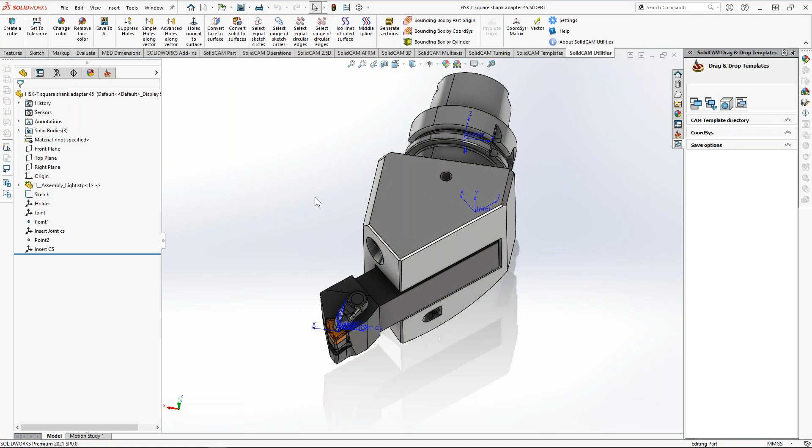I will be using the same part I used in the past, and probably remember the holder that we used in the previous webinar. In that webinar, I showed two very important rules about the insert and the joint itself. The joint has to be at the bottom of the insert, but the insert coordinate system should be on top where the Z goes up, while for the joint, the Y goes up, okay?

I also grabbed a couple of questions in the chat, like, do we really need to position it like that? It's quite hard to orientate the tool correctly, and what are the rules for this? Yes, and I promise I will show you all the rules about any inserts that SolidCAM supports.

So what is basically the rule? I will start with modification of this holder, but before modifying the coordinate systems here, I will show you how to not just remember everything I'm going to show you, but actually how to find it by yourself. Okay, what are basically the rules?

You can find this information in many different ways, but I'll show you my favorite. You just open the standalone toolkit and open it in tool assemblies. The reason for the tool assemblies is because you can insert any insert that SolidCAM actually supports.

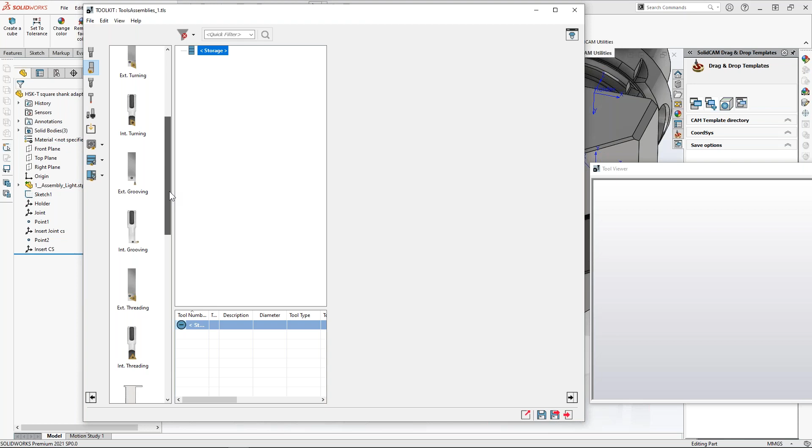So let me add external turning, internal turning, grooving. Of course, not in this way - let me remove this and start from the beginning. So I will add external turning, then internal turning, then internal grooving, external threading, and that will be it for now.

Now, what is so nice about it is you can use the tool viewer here, and it will show you - let me start from external turning - how the coordinate system should actually look. This is for the joint itself, and you can also click on the profile. What's nice is you can actually see the axis orientation. As you can see, it goes through the real middle of the insert, following this - it's symmetric to these two edges.

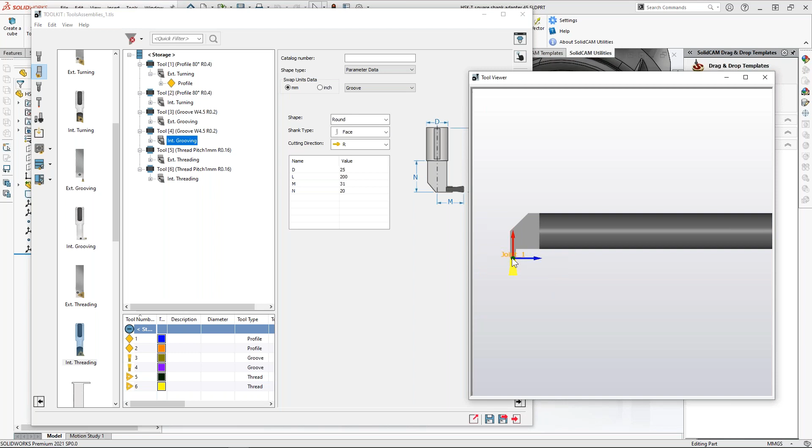So let's go with another one. As you can see, for the internal, it's the same - X is there. For internal grooving and external grooving, X goes in this direction. For internal, it's going in the axis of the insert itself, as you can see here. For the thread, it follows basically the same rule as external and internal turning, and we also have internal threading, which is basically the same. So the X-axis is the most important - it's always in the middle and goes toward that.

If you follow this rule with any insert type available on any tool manufacturer's website, you can download them. Before you actually define any of the shanks or inserts, guys, I recommend you first define it here in the tool assemblies so you can understand where the X should be. You don't really need to remember it - I could put everything in pictures in the presentations, but I think nobody would remember that.

I think this is the best way to find out how the insert should look like. So with that said, now we can actually talk about this insert over here.

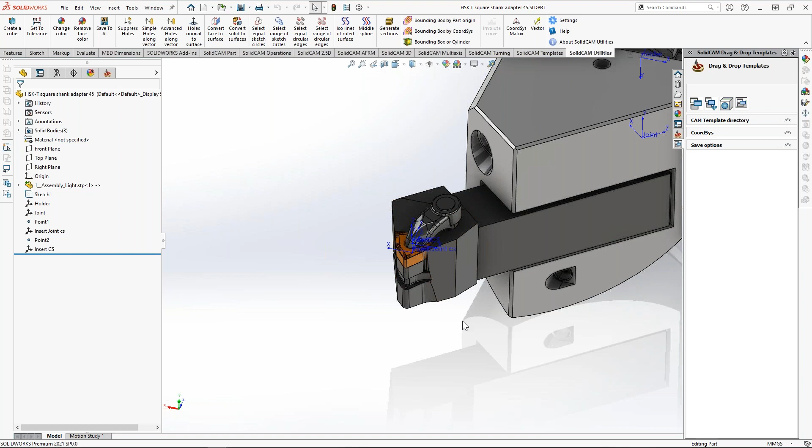I'll just basically use the external turning here, and X must follow this position. You can also change the insert shape, and you will find that X is actually not changing. It is changing depending on the insert type, but the rule is basically the same, except when the shape is R, but I think you got my point.

Now when you know that, the things I'm going to show you in the next couple of minutes is basically just replicating what I just told you.

Let's start with the insert over here. For this, it is required to define a little bit of some sketches in order to better define the insert itself. So I'll be hiding the shank in this case, and I will create, let me go over here, and I'll define, no, I need a point as well.

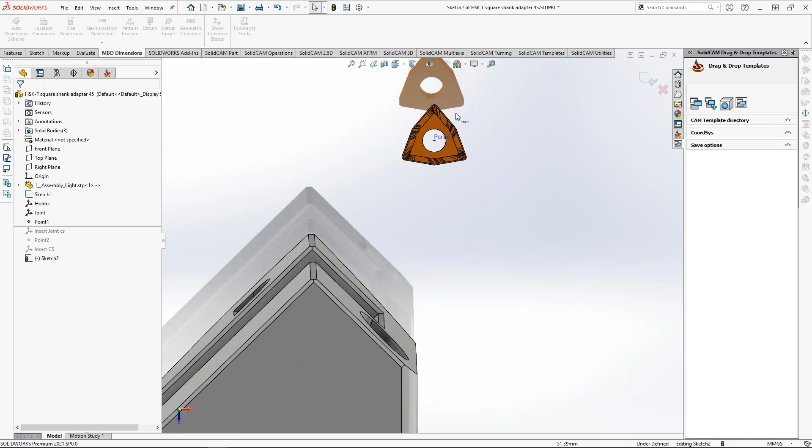I'll define two lines basically, which represent my X and Z axis, or X and Y axis, depends on what we are going to define. So I'll just select a line. The line has to go in this direction for the X. Let me go like this. The X must go here, with red, and Z or Y must go in this direction, and this should be the Y itself.

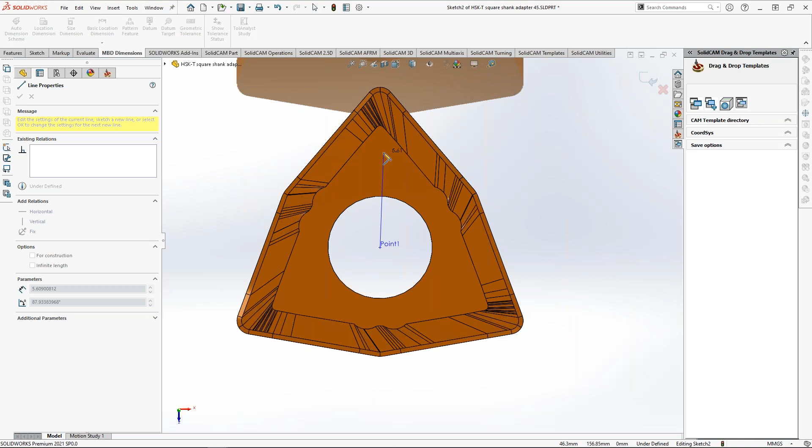So let's do that. I can go to the plane. It's pretty easy, just define anything like in this direction. Then I will just create another line. You can do it to be normal automatically, and I'll just click on the point, and you can click over here and say concentric, and it automatically knows where it is. That's basically it.

Now you can use this sketch for all coordinate systems here. So I'll be defining for the joint itself. For the joint, I'll be clicking this to be my X. For my Y, I want this one, and for my Z, this one over here. And this is the X orientation of my joint. So just remember, X is the most important, okay?

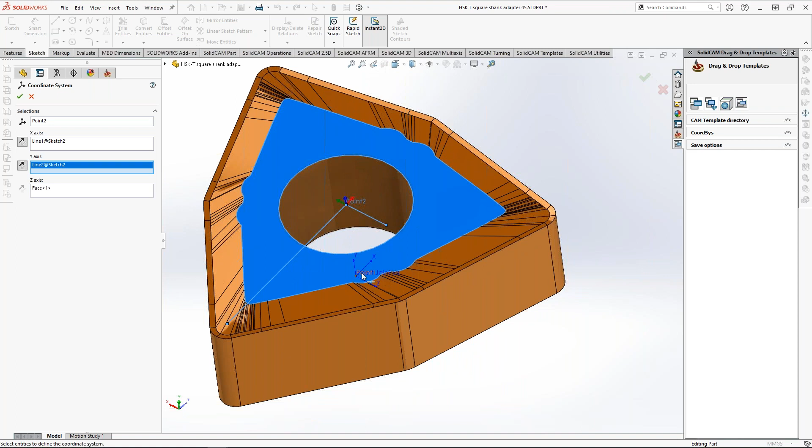I'll be saving this. Let's go to the insert itself. My X, again, this one. My Y is this one, and Z is going up, but I want my X to follow the same orientation as for the joint. So I will just switch my X in this case, and Y. The result should be the X follows also the joint coordinate system.

All right, so let's export this. First I'm going to export, let's say, the insert itself. So File, Save As. I will be putting this in the same folder as I was doing it before, the turning insert, and let me just put it into STL. Here it is already, so I will basically override it. I'll click on the options, again clicking on insert coordinate system, I'll be doing it fine. Click save and just override it.

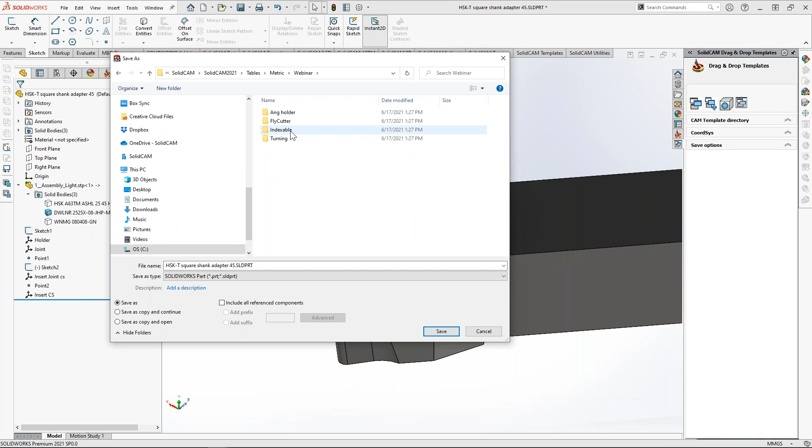Then I will unhide this one, the shank, and then I will export just the shank itself. So let's go again. There'll be a lot of this exporting, I could basically just export everything and show you the main stuff, but I think it's also kind of nice to see the complete workflow of how I'm actually doing it. Now let me go with the STL. Actually, in this case, I have it over here. That's fine, so I don't need to change the name.

And this will be, I think it's the joint here. The joint is actually the coordinate system of the shank. If you remember it, I think I didn't make a mistake. I will see it here. Yeah, exactly, so it will be completely fine. All right, so that's basically it.

Let's go to our project, and I will be just editing this tool component. I'll be again using the webinar, the one that we used in the past. And this time, let me see which one it is. This one, so I will be deleting this one. And let me just create it again. Yeah, so let's choose a 3D model.

Let's go to the webinar, turning shank. Let me rename it and just open it. Rename it over here, put it there.

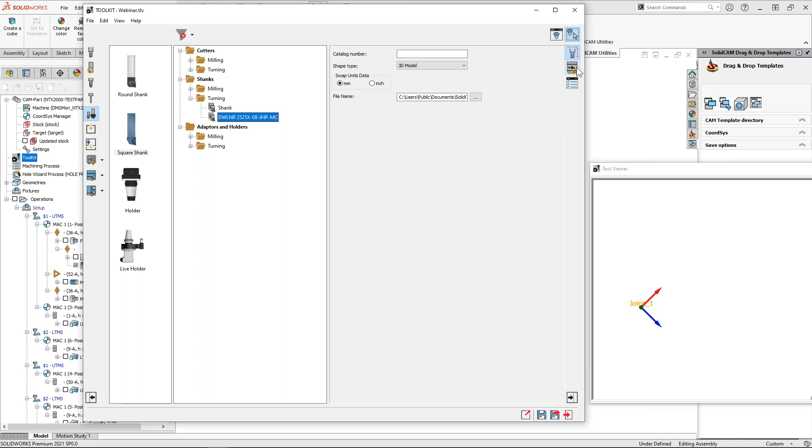Okay, perfect. Of course, we need to define the connections. So as last time, we'll just go over here. And you could probably note that I'm using a new version of utilities. I'll at least try to give you a short overview of what we have here new. Coordinate system matrix, the icon is changed a bit, and we have a new option of vector that I'll try to cover by the end of the webinar, okay?

So I would click on the coordinate system matrix. And by the way, it's still in development version, so you will get it on the website quite shortly.

So my master will be the joint, and the slave coordinate system will be, where it is, insert. I actually want to be insert joint. Here it is. Yeah, but I actually wanted to. Okay, so I'll just be clicking on, I'll just taking a snapshot here.

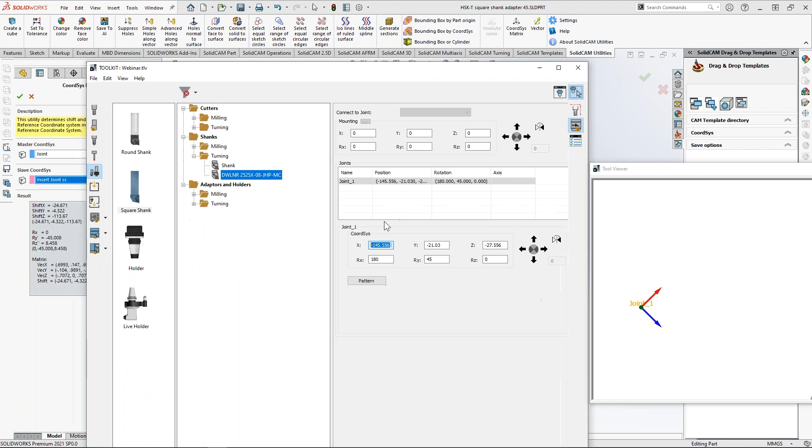I'll just move it to another screen so you don't actually basically see it at the moment. It's not so important. I'll go to the connection here and I'll just write here the values. The shifts are not the same. So let me just double check. So master, insert, that's okay. So let's see, so minus 24, 671, minus 4 point.

And of course, guys, also somebody is asking me, can we improve this also a bit? There will be a direct input from the connection itself. We are looking to find a decent solution for this. For now, just use the utility. I think that will be okay for now.

And as well as 58 here. So that's okay. Let's see. So the tool view.

That looks great. So let's analyze it again. So X should go, follow this direction over here. And we will just insert this one. So I'll just delete this, put another.

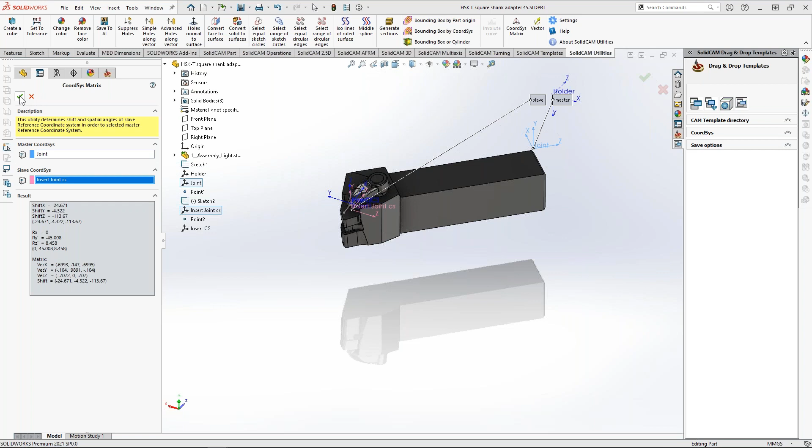It's a 3D model. I'll just be picking up this one. Rename. It's there. Okay, what we have to do, it's just to see how it looks like in Part Tool Table Library. I will be basically putting it into magazine, guys. Okay, so I will be defining like at least 2 or 3 similar type of tools, okay, with the similar shanks, and then we are going to put it into the 3-side holder. I think that this is the main idea.

So let me just, let's use the volt webinar. We'll use the shank. I'll just double click here. And on the insert, I will also double click here. Now, what is so nice here, let me just go to the connection.

And the only thing, guys, what you really have to do is to rotate the insert itself as it's coming like a default, like that. But as you can see now, there is no need to do anything. It is in perfect position here.

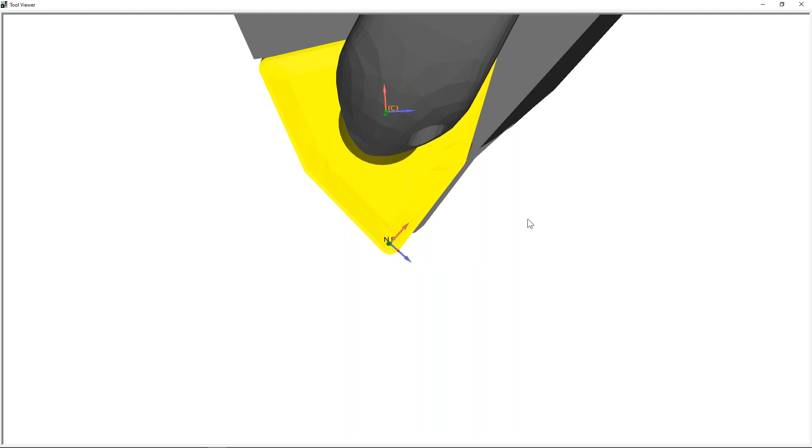Now, of course, if you want to change the offset here, the nose point, you can do that, of course. For now, if you want to do that in the cutting point, you can, of course, change it here. So you can pick it here, or depends where actually it is located in machine environment.

So I'll be clicking on machine preview. Here is the machine preview, and let me just put that into my station. And this is how it looks like.

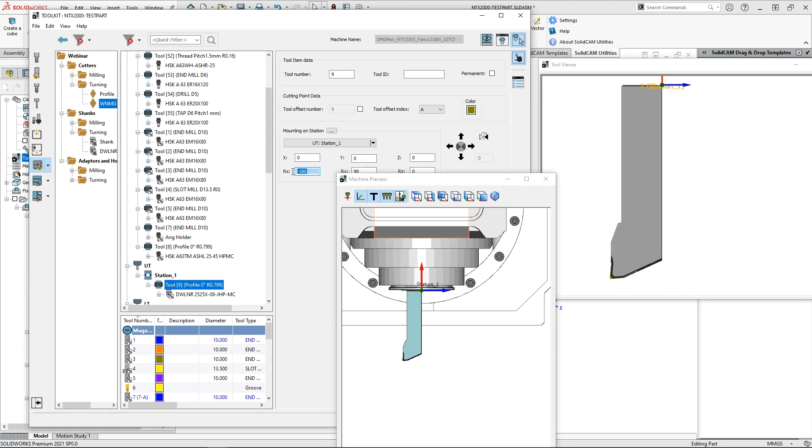Now, I say that my second subject will be basically the spindle orientation, guys. So, of course, if I rotate now this around the x-axis, and not shift, but this, of course, it will also work. I mean, this is just different orientation.

But if you want to, for example, use this tool for main spindle and sub spindle, so you'll have basically two different kinds of work offsets, you definitely need to use something that is called spindle orientation. Changing the spindle orientation from 0 to 180 degrees will allow you to have tool in two different spindle orientations with two different tool offsets to be used, also in the main as well as in the sub spindle.

For now, I will just show you that this cutting point here, it's just selected here. And you probably remember that we have here measured orientation where we can define also different B-axis angle.

But I want to show you, I'll just stop here for a moment and I'll just save and exit. I'll be showing you the option of activating the spindle orientation.

And what it changed in the toolkit is the way how we can actually set our tool offsets. So if I go over here and click on our cutting point, let me just allow machine preview here. So I have now the orientation, which is like a default one, but what's nice is that now we have here a spindle orientation function, which basically we can set like this.

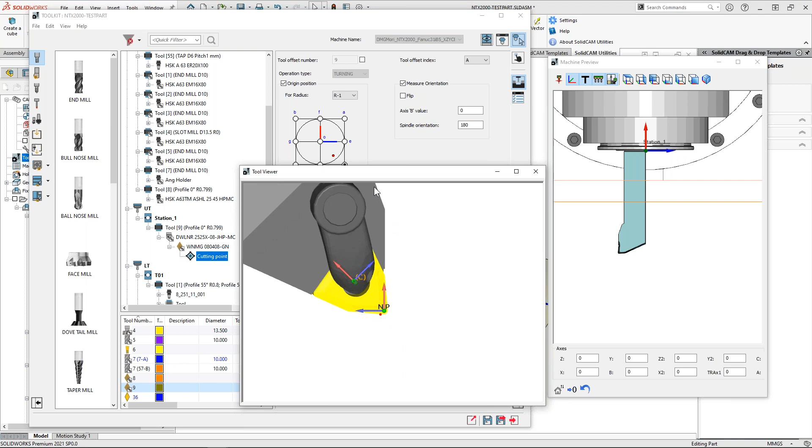So I can click on the measured orientation and I can say here 180 degrees. I just want to show you how this looks like. You can see basically in the preview, live, the orientation of your tool. Here it is, I like it, it's over here. So let me just use the proper one.

And here it is. Now, how this is matching, just rotate it over here. You will see this is the same orientation, and this is the point which will actually be the tool offset in this offset, okay?

Now if you want to use another one, you can add a new cutting point, and now you can measure your tool over here. So I can pick a different origin, I can set this one in this orientation. So basically, with the same tool item, I can have two different orientations used in jobs.

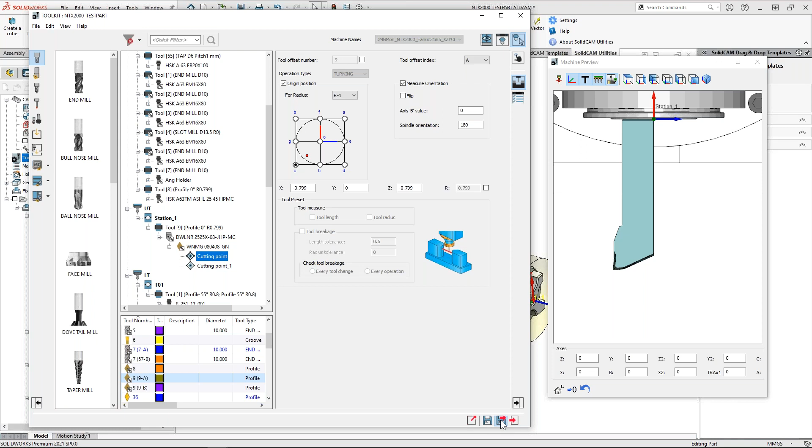All right, this is regarding the spindle orientation, but of course, guys, I will be showing you even more advanced stuff with spindle orientation. This is so nice with the three-side angular holder that I think most of our customers have been waiting for this for 5 years at least. Not so common, but it's something really nice to have, the capability of using it with different shanks and sensors as well.

So with that said, let's go to another example. I will be now using something different, and I have received so many requests - can you please show us this and this and this? So let me pick up something. Let's see here.

Yeah, it was a groove with 3 mm. Let me just find it. I think it's this one, but no. This one is a groove, maybe not actually. Let's see.

Yes, exactly. Now this particular tool is just 12 mm, so it's nice for the cutoff. Also for grooving, not for the cutoff, and especially for the Swiss type machine. So I'll be using this particular one at the Swiss type machine. But what's so nice about this one is the very special insert. It's a groove, of course.

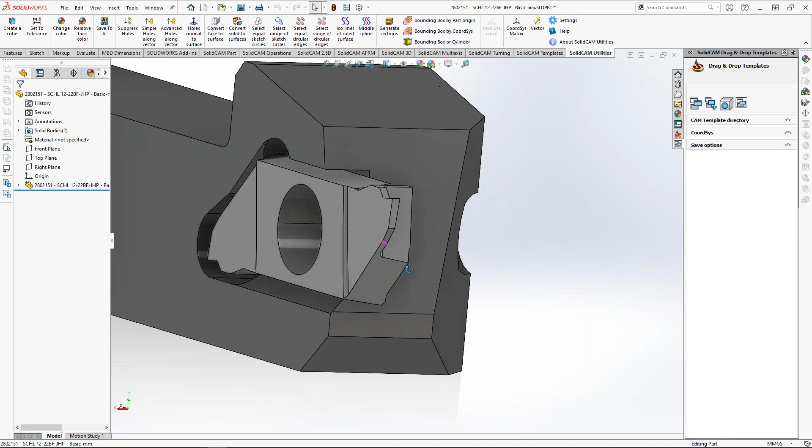And everybody wonders how we can define this, especially here - it has some kind of weird angle here. So how can we define this particular groove tool?

So let's start with this. Again, I don't want to show you again, guys, the stuff in the assembly that I've shown previously, but basically the idea is that we will define a coordinate system where my y-axis, for the joint coordinate system, will go up here, and x is going in this direction. For the insert it will be the same here, but for the insert it will go with z here. Okay, so this is the main rule that we actually have.

But here we have another problem: the insert height is not the same on this point and not the same on this point over here. And it also has a slight angle, and the same insert is basically kind of mirrored in the middle. So how can we support this?

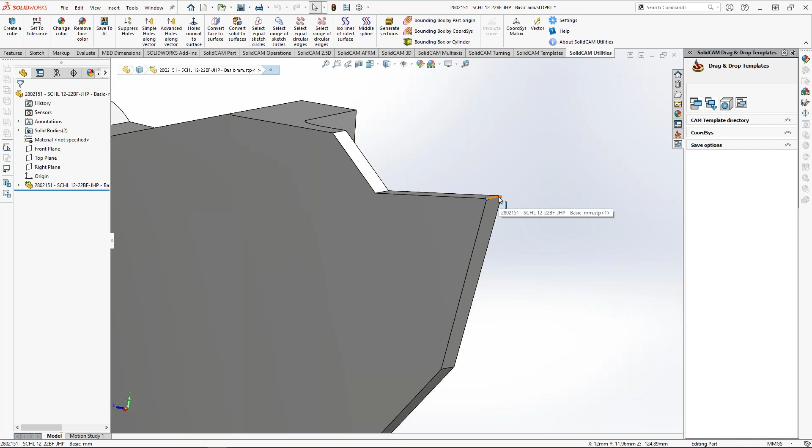The idea is to bring your insert coordinate system onto the level of this edge over here. And basically the joint will be at the very bottom of the insert, okay? So how do we do that, guys?

So first I will be defining a plane. And my first reference will be, no not the vertex, but I want this plane over here. I want it to be parallel to this one. And my second reference will be just this point. With this, I have the point and it's fully defined, so I can just basically move it over here.

That's it. And another one, I will just define the plane, and I want it to be parallel. And the second reference would be the lowest point over here, which is this one over here.

All right, so now the harder part - where to put the coordinate system. Now, as I said, in this case, it's not important. I would basically put it here in the middle of the insert. So I'll just hide this one. Let's make a sketch, go over here.

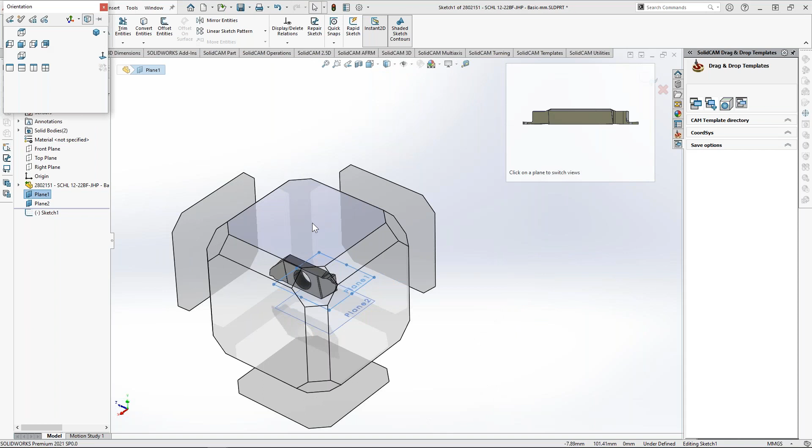Let me make this a little bit more transparent. I want to click on this, convert it. Conversion of that entity here will give me the possibility to put it really in the middle.

So I'll just create it like this. I have basically all the elements I need for creating the coordinate systems for the insert and the shank itself. So let's click this. This is a boring part, but anyway I'll do it. I'll put that in the point. My X is going in this direction, guys. Z must go up, so my Y is here, Z goes there. I'll just switch the Y axis.

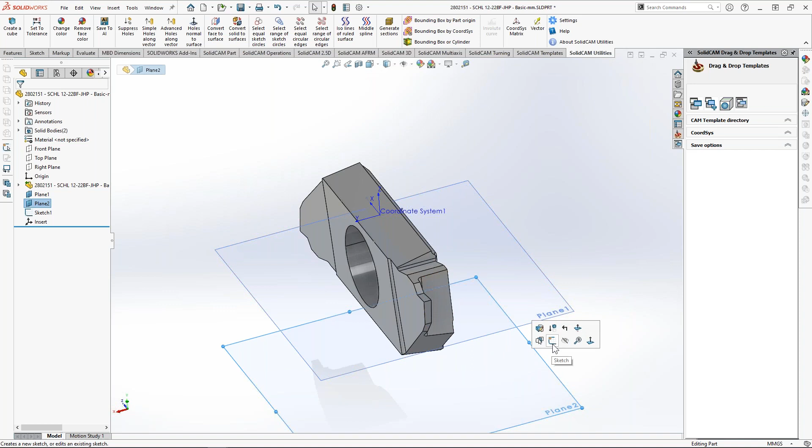So Z goes up, I'll be changing this to insert coordinate system. For plane 2 I'll define a sketch, pick that point we just generated and convert that entity. That's all I need, so I can create a coordinate system where I'll place it over there. My X will follow the same, my Y will go normal to this plane, and my Z will be over here like this. So Y goes up. It's kind of in the air, but don't worry guys, that's completely fine.

All right, so that's basically it. Now we are going to export this. One thing you can note here is that I didn't define any coordinate system for the Shank. You can see the coordinate system at the bottom, showing the global coordinate system here, the origin. You can see that it's already there, so I will not touch it. I will just use the default one that is there, coming from the tool manufacturer itself.

So let's export it. I'll be doing metric webinar, and I'll put it into a Shank. Of course, guys, I just forgot to hide this one. Let's start with the Shank - again, metric webinar, turning Shank over here. I'll just hide this one. And again, the same stuff here.

So there's something I would like to also mention. Here I have the insert, but I need it for the Shank, so I will use the default one. I'll use coarse here. And definitely guys, this is quite simple.

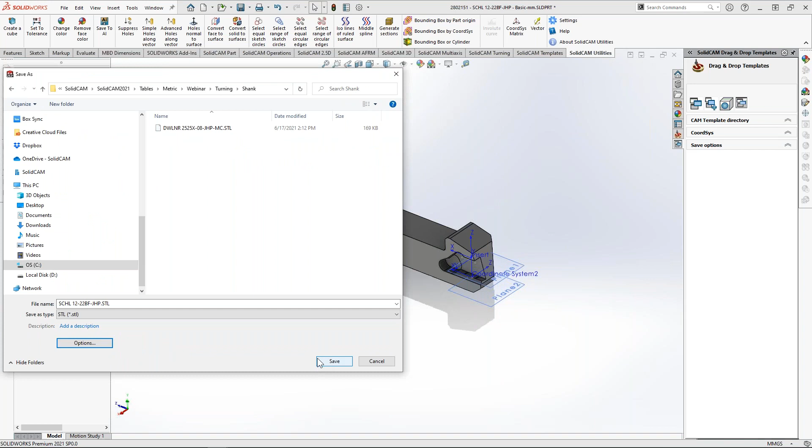These shanks here are simple, but if you have any possibility to make it, to simplify it, when you're building very large libraries, make it as less detailed as possible. I'm not cleaning any details here, but you should consider removing unnecessary rounds, the corners, which are completely not necessary for collision checking. I would definitely spend extra time if I really want to optimize my tool components libraries.

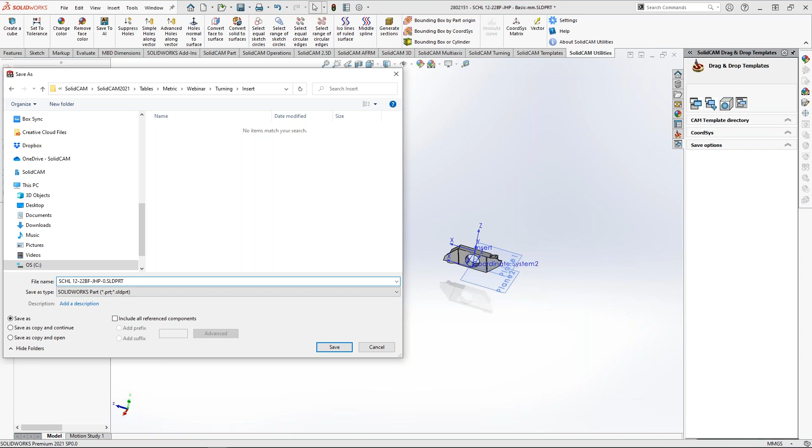Let me unhide here and hide the shank, and I'll basically save it as - go to the insert. I'll be calling this the same one, just of course it's not the same, but this one, I think it's 3 mm, no, 0.5 actually - 0.5, and it's the STL. I'll do fine here, and this time I'll click on insert, and that's it. Save.

Yes, okay, so unhide this one. What I basically need is just where this coordinate system is compared to coordinate system 2, which is actually the joint. So I'll just click on joint and matrix, and it will already show me these things, so I'll just pick up this. So if you save the coordinate system, for the second one, the first one will be considered the main origin.

Okay, so again guys, move this over here, close the previous one. Let's go here. Okay, so edit tool components. I like to do everything in tool components first. Really, you don't have to do it - you can just directly use it in your library, in your part tool table library. But if you will ever use this again, it's better to keep it in tool components for sure.

Turning, let's add shank here, square one. It's a 3D model, let's go over here. So webinar, turning shank - this is the one, so I'll just open it. Great.

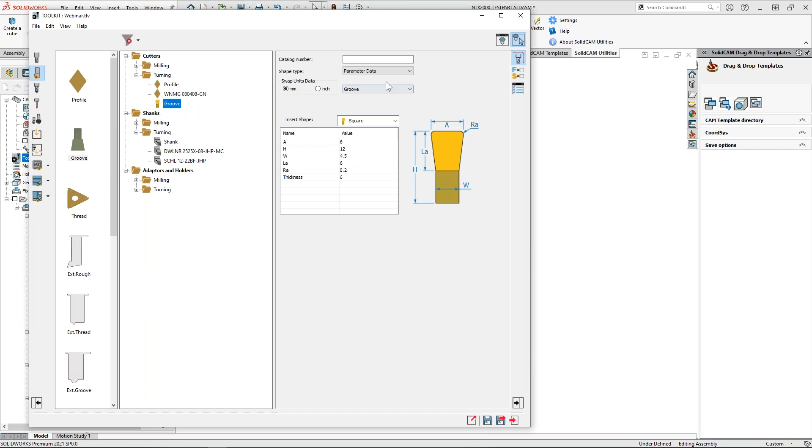And what I also have here is the profile. As it is for the grooving, I'll just use the groove icon here. It will just change the icon itself. So let's go here.

Okay, I should not forget to change the origin position here. I'll just copy it from what I already typed, found out from the T matrix. This is quite simple: this one is 0 actually, this one is -90, and this one is 0. Just to double check it.

Yes, it looks great. So don't be confused why it should be over here. For the grooving, it should go normal to the insert here, X parallel to the shank.

That's okay, let's see the insert. Insert is perfect, it's over here. I like it, great. So let's go to the part tool table.

As I said, I will use this tool in Swiss type, but anyway I just want to see if everything works fine. So do the turning here, double click here, and double click on this one. Again, go here, just put 0. I just want to show you guys that this works really, really nice.

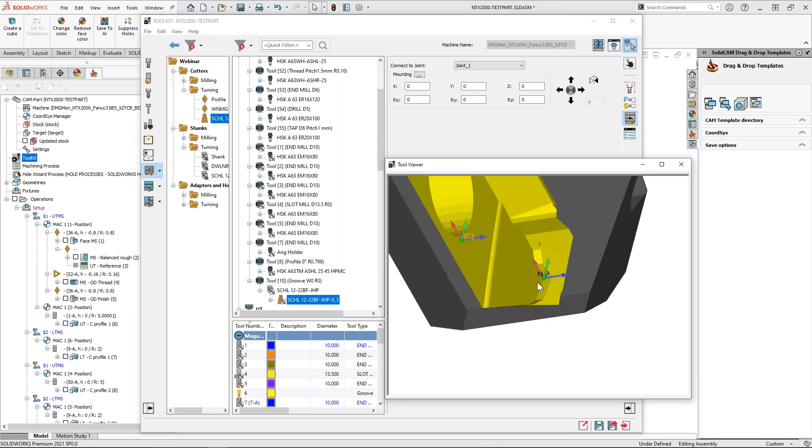Now, even though you need to see that I have no groove here, there's 0 R, let me go ahead and show you here. There is no radius there, and it's still detected, okay? Now you need to be careful - in some inserts, maybe there will be no possibility to detect the nose point, okay?

And in such cases, you can also in CAD pick this edge normal to the plane that we created, and create a very small rounding here, minimal - you can do 0.1 or even smaller, just to be detected by SolidCAM itself. In this example it's perfectly detected, so that's great.

Okay, so this is the example of the groove, and the next example I'm going to show you here is the thread. Okay, so with the thread, let's go not here.

Thread is quite interesting a bit, let me just go where it is. I have two of these, one with the coolant option and one without. So I'll go with the coolant option - I like it more, it looks much better, better details.

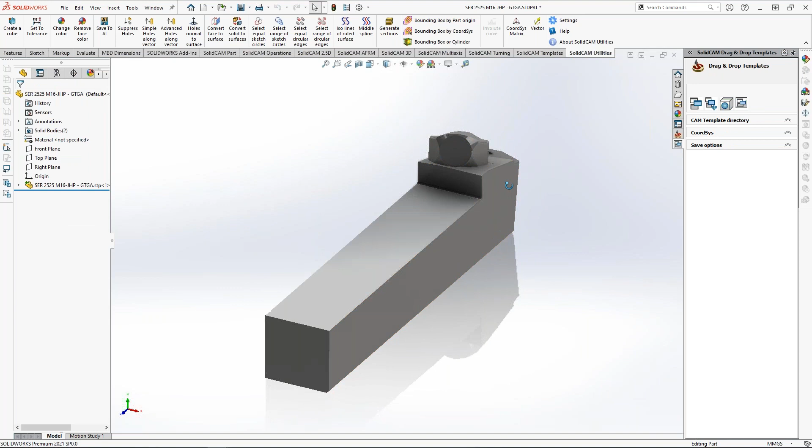And this is, guys, what I tried to tell you - in this example of the holder, this shape, it's pretty. It will kind of use a lot of memory to store it into STL. Maybe you can make it a little bit more simpler to not take the unnecessary data. Anyway, the subject is the same.

I will be mostly focused on the insert itself. So again, remember that in this example, let me just unhide. In this example, basically the X goes in this direction, okay, and the rest basically for the joint as well in this direction.

So I'll be hiding these, creating the coordinate system. Now I have lost my orientation. Okay, so it must go in this direction. Okay, so let me hide it.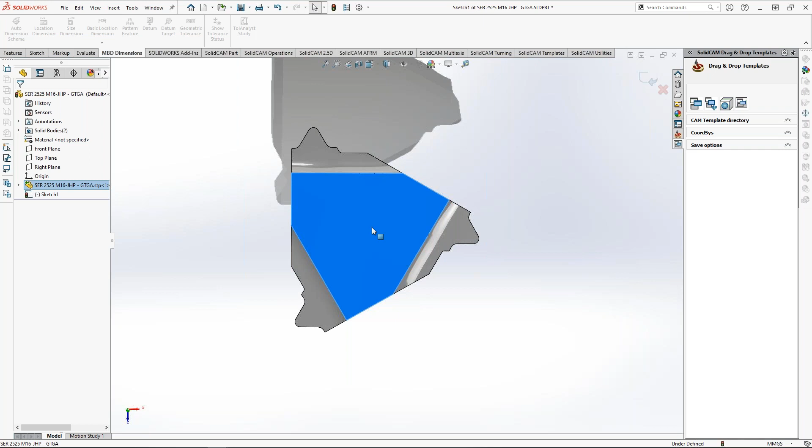So there are at least 10 different ways how you can find the center of the insert. I'll be using one that I found is quite okay. I'll just be defining a simple line, another line, and I'll just make them - I hope I didn't make any relation, but okay.

So I'll basically say that they are collinear with this edge over here. And the reason why I'm doing this is just to find where the center is, okay? If I really want to make it perfect, I will just then extend these edges over here. Nice, and then I'll just remove these.

As I said, you can find different ways how to do it. I'll just find here the center. I can do also again for this side over here. Here we go, so here's the point.

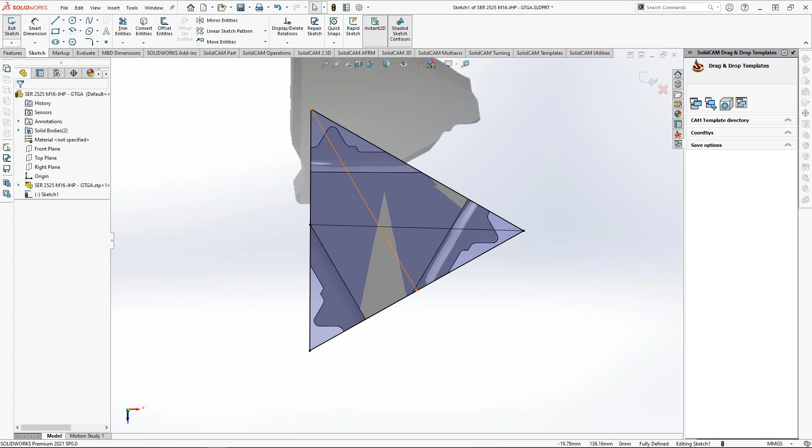Great, we have the X direction here. We just need to find the Y direction. I'll just say that this is normal to this one, so I'll just say perpendicular, and we have all the elements that we actually needed.

So I'll just make all construction lines, save it, pick this, make a coordinate system. I care about my X-axis. I'll go a little bit faster if you don't mind. My Y goes in this direction, and Z goes normal to insert.

Of course, switch the Y, so X goes in this direction. So I'll just save it - this is my coordinate system for insert.

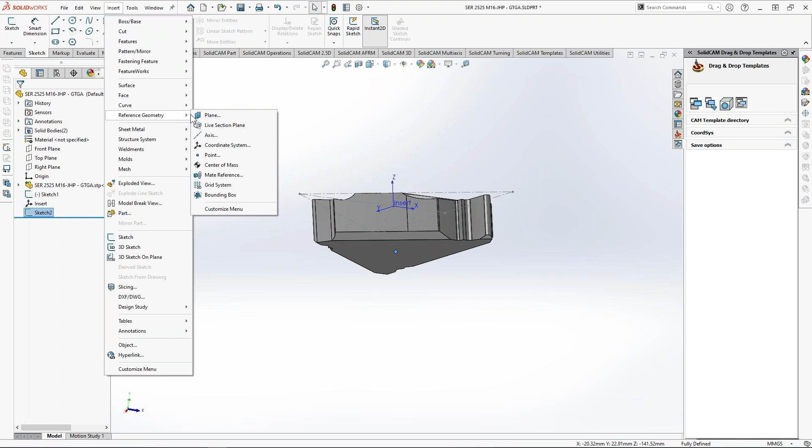And at the bottom one, I will be creating another. I can create a sketch in this case first - so first a sketch, and the reason is I just need this point over here. I will convert it, I have it now, and just create a coordinate system. The X again here, Y here up, Y here, and Z follow this one. Perfect.

All right, that's it. Let me unhide this. I will be first exporting the Shank, so I'll just do save as. Let's repeat the same process, guys.

We are of course looking... I see the question, of course there is. We will try to detect all the coordinate systems so we can pick it and do somehow automatic exporting. But no promises for now, guys, we will check for the possibilities.

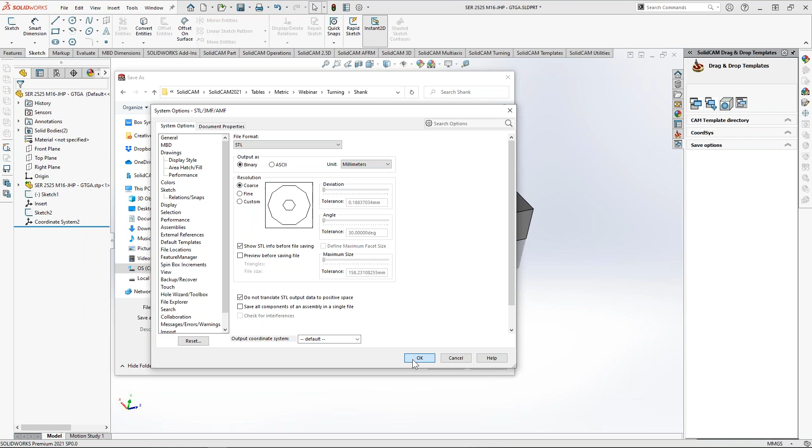Shank, yeah, this is just Shank. We have these STL, let's do like this. Of course, and I will pick as a default. I think it's nice. Save.

Now I need for the insert. I'll do define, I'll go insert here. Perfect, this one is my joint, and I need basically the information towards this joint. So I'll just go to the utilities, click on the coordinate system matrix.

I have it here right now. Let me go with the results here. Perfect, I'll close the previous one, it's on my other screen. Let's go to my tool components.

So let's insert square shank here, 3D model. My webinar turning shank, this one, so I'll just rename it. Again the same, perfect.

My joints. 913, 141.521, and here we have also some crazy number. Just to check if this is correct. It really looks to me. Perfect.

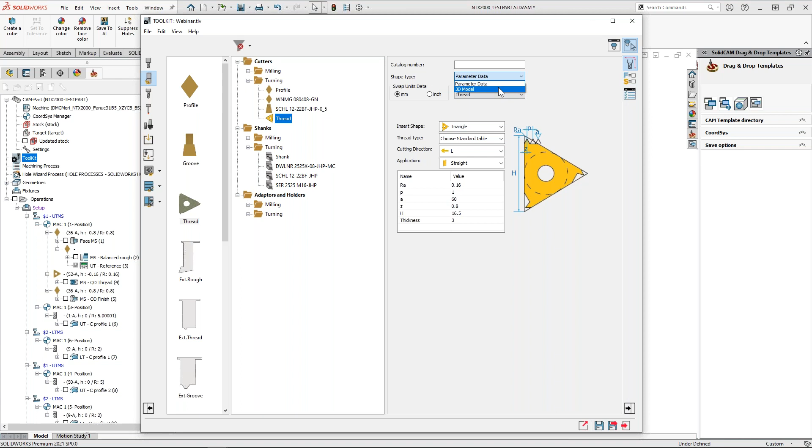And then we have an insert, so I'll be putting my thread. 3D model. You can also pick the name from here, guys. Great.

Insert is perfect, coordinate system is at the bottom. Let's see it. Okay, so I will be using my Volt again. And after this, guys, we are coming to the fun part, really. So let's add this one and let's add this one. Perfect, I think this is just perfect. And of course, don't forget, click on the insert, go to the connection, just remove this -90.

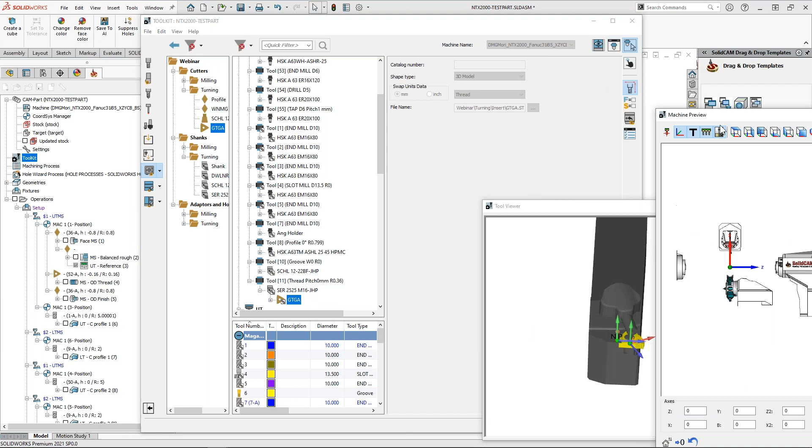Here you go, in perfect spot, guys. Of course, as with any insert, here you can check this, go to the orientation, change the origin to be along the X, so you can pick up this line over here. Or you can also shift it along the Z axis, guys, so you can go and maybe use this point over here. In this example, I'll just use this one, and I'll just save and exit.

Okay, let me just jump into questions. Do we have questions, please? Okay, there is also a question like, can we do this also for the Inventor?

For the Inventor, basically it's the same process, okay, except that you don't have these coordinate system matrices. We are working on the solution to have everything in a new tool table, so we will keep you updated, okay?

Good question. So how to set the pitch in threading insert when we have the 3D model? Basically, there will be no pitch in that case. You are okay, guys. So whenever you are using the STL, as I mentioned in a previous webinar, whenever you use the STL, we just use this as a geometry.

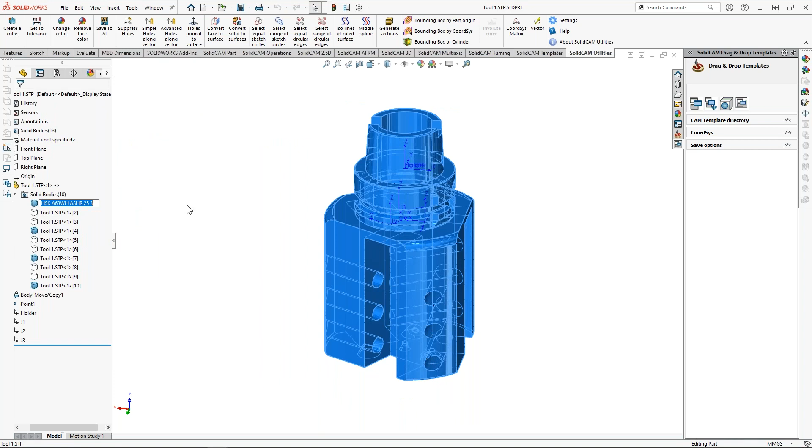And I will be just defining, exporting this one and using it in this project. So just file, save as, and let me just try to rename. Is there? Yeah, so let me try to save this, I'll be putting it turning. Nope, wrong folder, metric. Let's go to the webinar turning and like this.

I think I already have it here, so anyway, I'll just, of course, check it before if it works. So I'll just use for the webinar here, just for you guys to see it. It's my holder, goes here, and that's it. So I'll just save it. Perfect, okay, so let's go back into project.

Of course, what we need more, I forgot to mention here, for each of these we need the joint. So I'll be taking for each of these a screenshot, and I'll just say joint 1. I'll move it here. I need for joint 2.

I'll take it. And I need for joint 3, like this. Perfect.

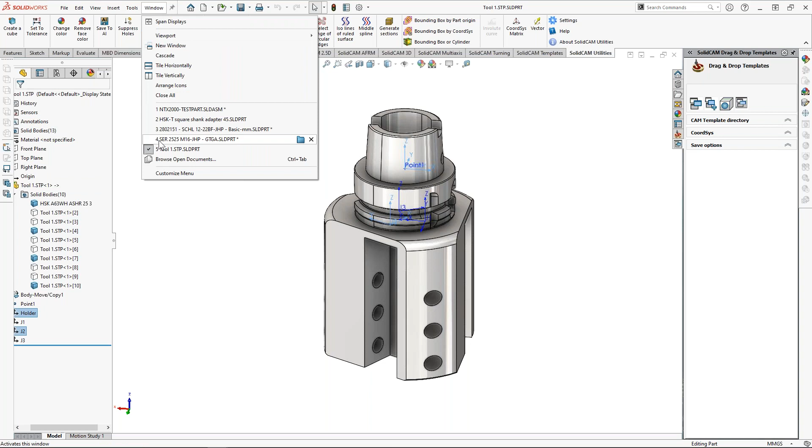Okay, so let me go to my assembly, tool components library again. And here I have it. So I will be just defining the simple holder, and I'll pick up this, taking it like this, putting it like this, renaming it. And let's go with joint 1.

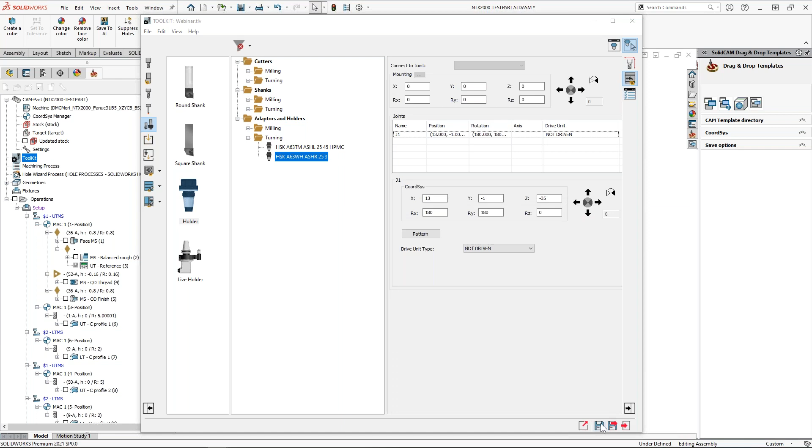Oh, great, I'll just save it. I will not remove it. Okay, guys, so let me go back here. So it's kind of here, but it's not there. Okay, so let me save it, save as. The good thing about this one, maybe it's good that it actually happened.

I showed you this a couple of times, but I think it's always good to mention that whenever you do something like overwriting the STEP, you shouldn't be worried that something will happen where you'll need to define it again. There's no need for that. You just go back again to your tool components library, and you'll note there is no need to redefine it. The joint is there, as you can see, and we'll be defining a new joint.

So I will add a new static joint. You can see the properties are taken from the previous one. Let me just hide this one, and let me find the second one. Okay, here it is.

So -7.366, -10.758, -35. And this one, it's a little bit different: it's 0, 0, and 60. Now, these angles are super important later. And I will call this joint 2. Of course, it's also not driven, and I will add another static joint.

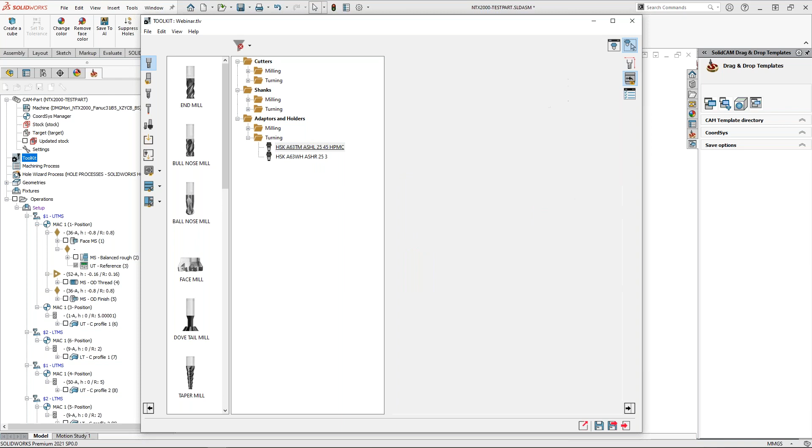And this one is 5.634, and also -35 here. And over here we have also 0, 0, but here -60. Great, that's it. So this one is joint number 3.

Perfect, let's see how this works actually in our part. So I will define from our library, we have it over here. And the inserts that I'm going to use, let's see. Maybe I can use this one, I can put this one for sure. What about this? Yeah, I can put this one too.

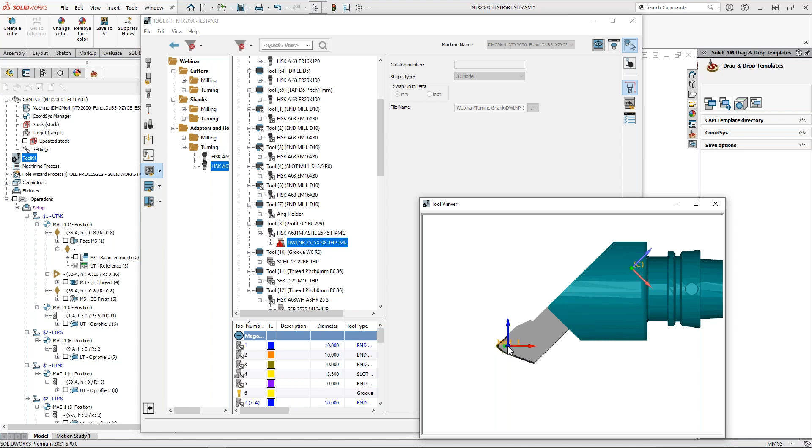So I can copy this tool, I'll just paste it here. Then I will take, for example, the 45 degree one. Let me just - did I define it or not? No, I didn't, maybe I didn't save it.

Oh, here it is, okay sorry. So I'll just copy this and I will be putting it here. And maybe for the final one, I will just define it just over here, like this, maybe rotating it here.

But in joint 3, this one will be joint 2, and this one is joint 1. So let's take a look, guys. So joint 1, I just need to shift it along the Y, so like -25. It's over here, perfect. For joint 2, let's see the joint 2 here. This one, it's perfect, just I will move it a little bit along the Z here, in the minus, just to have something more realistic.

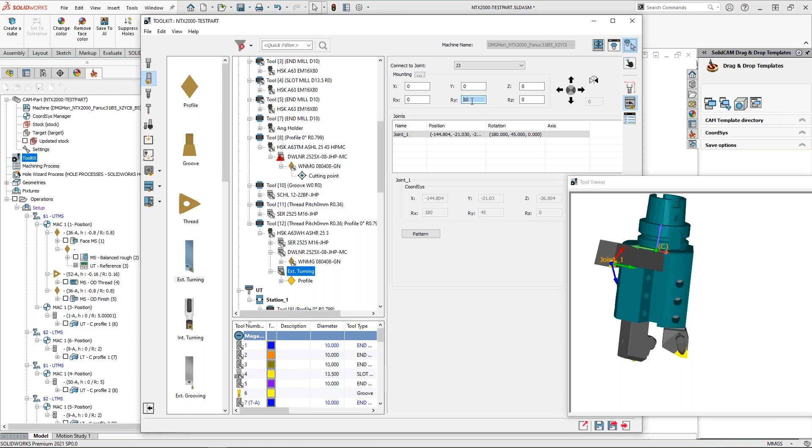And the third one is over here. Let me rotate it around the Y here, so it's like -90. I will also maybe rotate it first. Let me just first rotate it, so I'll just define like 180 here, and then just rotate it for 90 degrees. And of course, shift it for 25 in minus.

All right, so that is how it looks. Maybe not so long in Z, and maybe I can actually use a different length here, like 125. And then put here 0. Here it is, guys, completely 3 different inserts, 3 different joints.

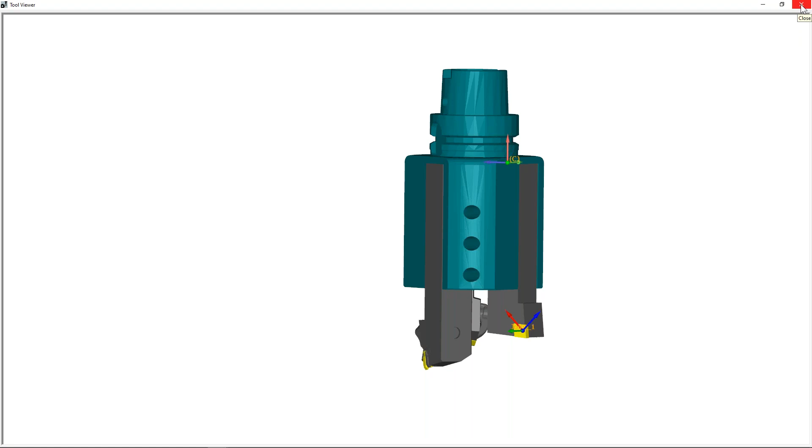And now there is one thing that is missing. Now for each of these joints, we need to declare on which spindle orientation they are measured. So this is the last step basically for joint 1. We don't need to change anything, I believe, so I will just run the machine preview here.

To see everything, you need to right click and mount it first, so you can see the orientation. As you can see, the orientation is perfect. But what this also allows you to do...

For this cutting point, you can now rename it, and say main spindle. But you can add another cutting point, and say back spindle 1. Of course, you can put anything you want, like 1, 2, or A, B. It's really up to you guys.

I like this for the webinar, like this. So measure the orientation 180, so I can use this one. So nice. For this insert, I already have 2 cutting points, but I will not use this one.

If you remember, we need to use 60 degrees, or in this case maybe -60 degrees. Let me go more. It's 120, so I need 120 in this. For this one, maybe I will need 60, right? For this one will be -60, let's see, -60.

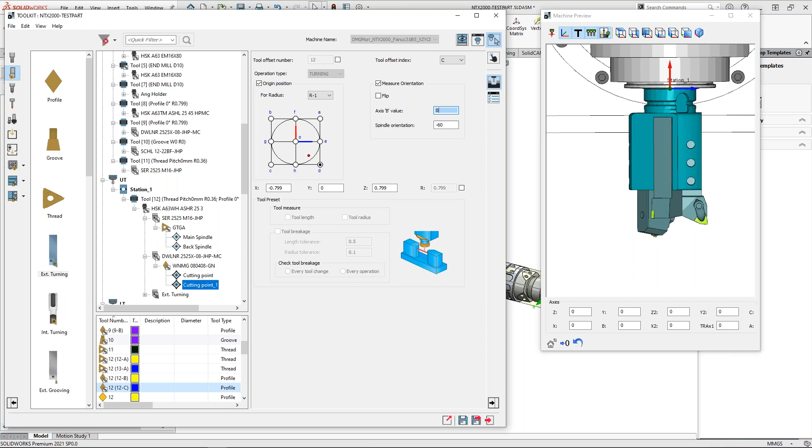So I have here 2 cutting points, also main spindle and back spindle. You can choose which one you want. And the third one, I'll just leave it as it is.

I would change the measured orientation, you can also see, guys, everything is so nice. You can go very positive or like -60, and that will be -60 or -120. Let's see, yeah, -120, here we go. I would like to just change the insert type. So beautiful. Okay, so here that's it.

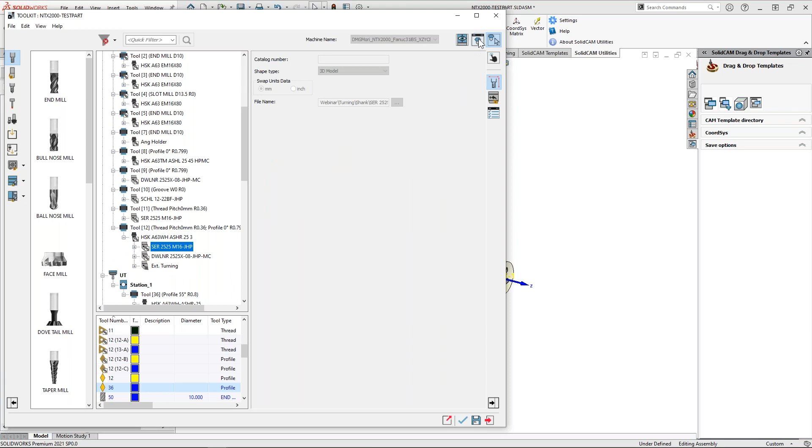Let's see how this works in this particular job. I'll just take the face. I'll just change a tool. Which one? Let's see, I'll be using this in join 2.

So one very nice thing, guys, we have improved also the tool selection. So if you have only one particular tool, or let's say cutting point, you can basically click over here and click on accept, okay? Or you can click on a particular holder and click accept.

If you try to do a selection where there are many tools and tool offsets, SolidCAM will tell you there is a multiple touching point, so please select only one of them. So in this case, it's impossible to select it differently than by clicking on the cutting point itself.

I'll just click on this one. I hope I selected the correct one. Yeah, this is the correct one. Let's save and calculate.

Let's simulate it. I'll just use the Host CAD, and here it is, guys. It's so nice. You can use it in solid verification. All these holders will be taken into account, so if you hit any of these shanks, it will be reported, especially in solid verify.

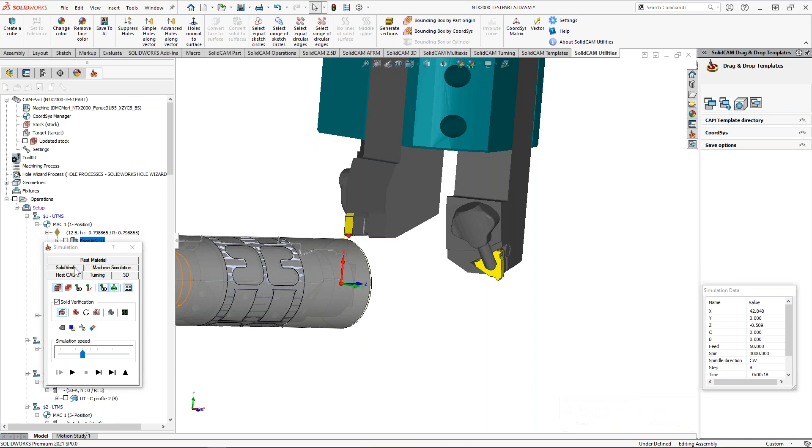Now the only point will be to select all of these in all the rest of the jobs, okay? But in this webinar, I think you understand my point, so I will not go further with this.

All right, and the next thing, it's a special request to show you guys, a very special insert. Let me go with that one.

It's over here, the 5-star insert. Not this one for sure. Let me close this one. I think it's this one. Nope.

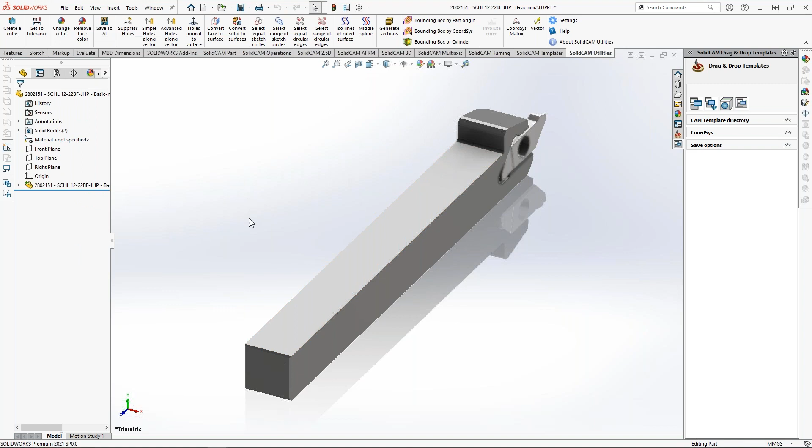Maybe I didn't even copy it. I think I didn't even copy it. Yes, okay, just give me a second. I will be on another screen, just making sure that I copied the right one. Just give me a second. Okay, I think it's this one. Yes. Okay. Let's see. Yeah. Okay.

Here it is. There is a couple of features that I already defined here. This is the insert, and I'll basically delete everything up to here. So I basically take it from scratch.

Let me also delete this one. Yes. Delete this one. And this one. All right.

So actually, I will leave the sketch here. So here's the shank, here's the insert, okay? And here probably you may ask, okay, how can we define this one. This is not like a two-sided insert, okay?

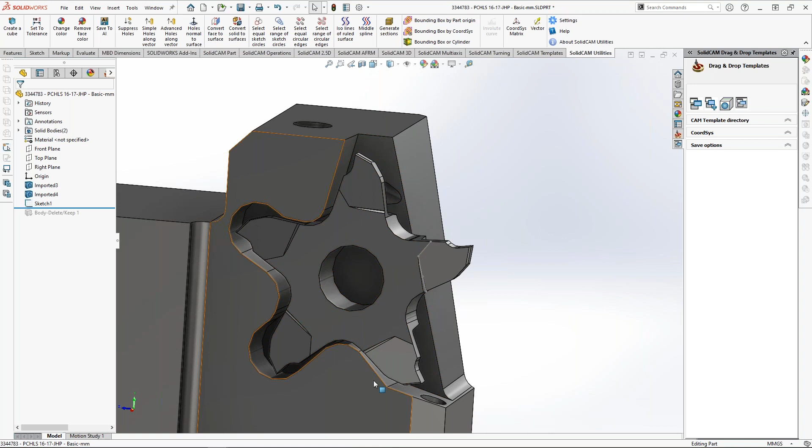It has more sides here. Geometries that are on the top, also on the bottom, will basically confuse the insert itself, or let's say the main cutting area of this insert. So basically the idea of automatic nose detection is to reduce the geometry for this insert, okay?

The way you can do that is basically to split the solids of this insert. So I have already created the sketch, but you can choose whichever you prefer. It can be even a straight line here, but I basically choose this edge over here. I create a surface here and split those two into a solid, so this can be one geometry, this will be the shank, and this will be only the insert itself.

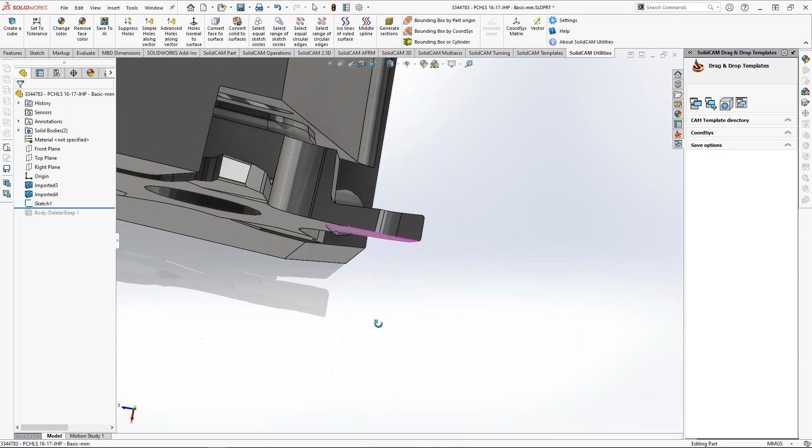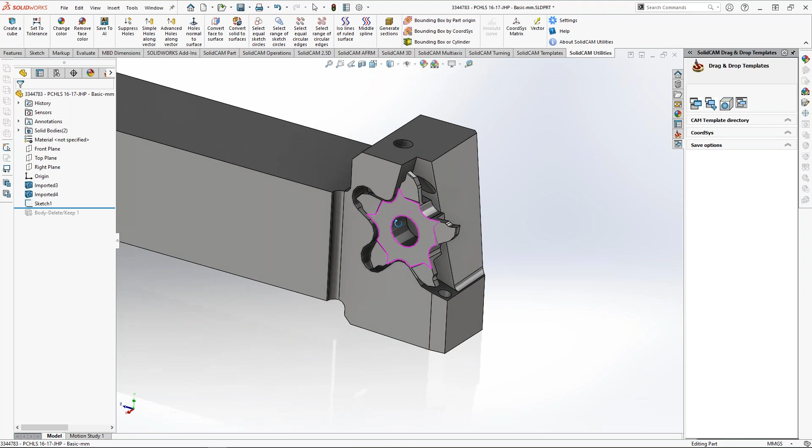Then I will again select the groove, pick the same geometry, and this is how you can actually define this kind of insert. I think it's not really necessary to go through the same thing, but you will basically define it on any edge. I will pick, for example, this one, X in this direction, Z in this direction. For the bottom, please select the bottom possible, so here you will have the split line. You define the plane in this direction, again make projection of that point, and again define Y up and red over here. I hope this gives you another idea how to do this nicely.

This is a nice one. I will not do it, but you can basically try it. You will have it, and you will be able to download it, so you can try it also on your side.

And now the stuff what I wanted to show you. Yes, exactly, Swiss type. Let's go to this project over here.

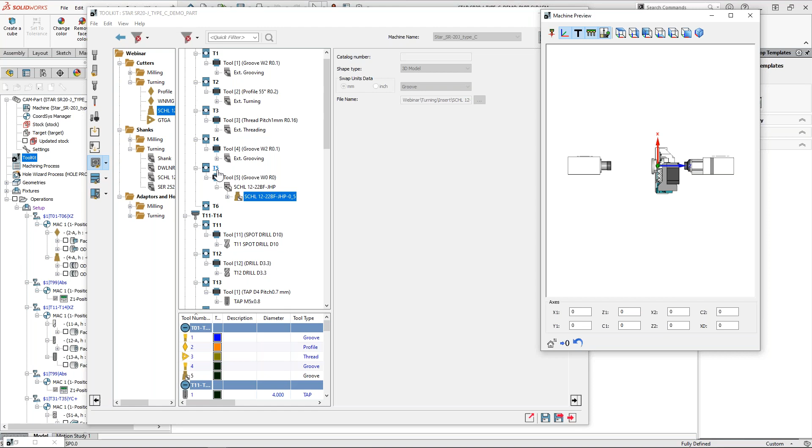With this one, I just want to add one tool that I have defined before. That would be the same that we have used. Is it this one? Let me try, let's see. Yeah, this one, 12, and this one will be this over here. I define it on the tool number 5th position on this Swiss type. Again, don't forget to move this to zero. Perfectly, here we have it.

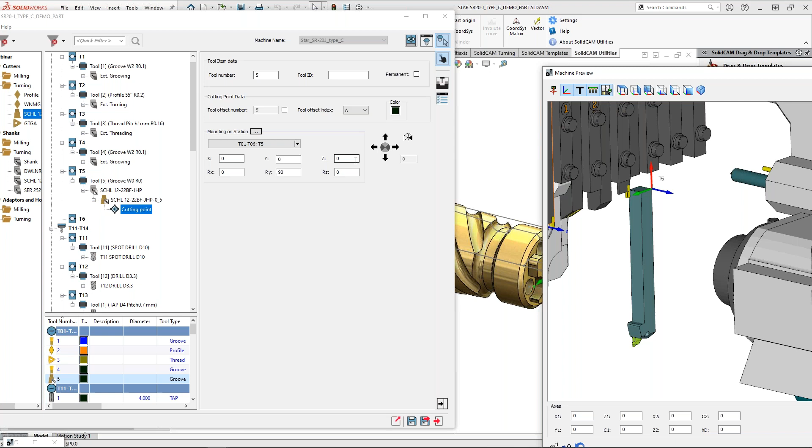Now, for all Swiss type fans, I want to show you one very nice feature that we implemented in SP2. Over here, you will be able to, when you click on the cutting point, see this new button with the 3 dots that will allow you to make a position more quickly than usual. So what I will basically do is make the shifts and stuff.

But really, on the Swiss type, all the offset is actually coming from the default tool position of your station. So how to move that to our tooltip? Basically just click on this and reset its position to the tooltip. This is where your tooltip will be, of course. You need to shift it a bit if you want to really get the correct spot here. But I hope you got my point.

Actually it's 12. You can really set up your insert over here how it should be. Of course, you can now set position according to the tooltip offset, and now you can have even better management of where it is - is it positive in X, is it negative in X, if it's longer or shorter. So it's located over here, just remember. I hope it's a nice one.

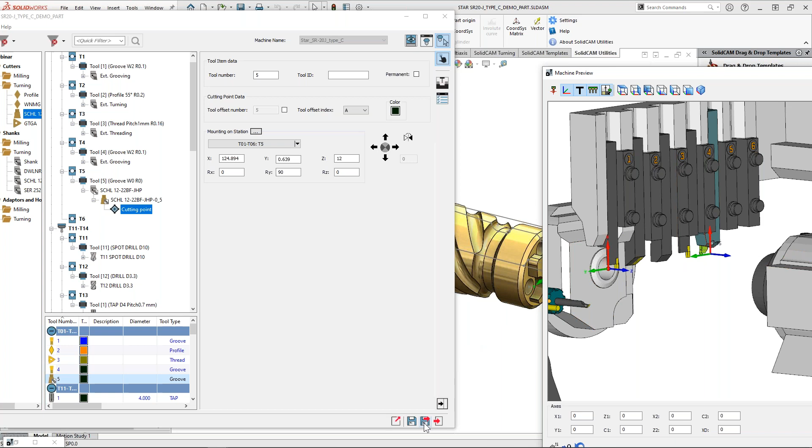And the last thing for the final webinar today is to show you guys how to use a new feature that we have in SolidCAM, which is revolver indexed positions. First, let me show you the holder. And before I go there, I will actually use my previous project.

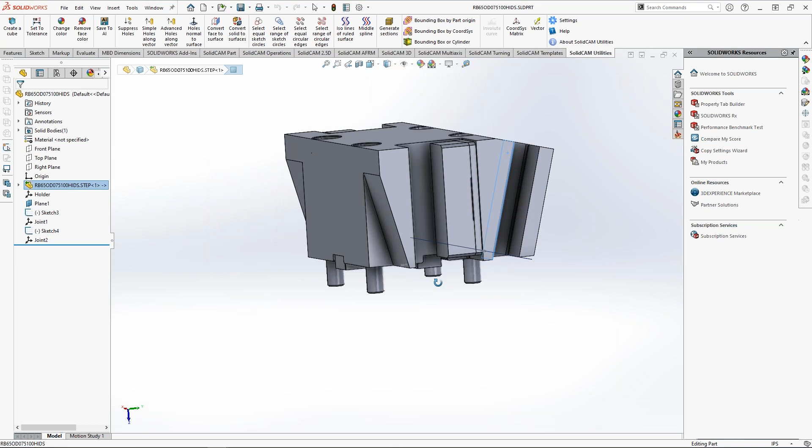Let me open it. I didn't touch anything, so turning, tools used, and it is here. This is a fast twin holder for the turning tools. It has basically kind of an indexed position over here. Basically it's the capability that the revolver on a particular station will rotate for a particular angle, just a bit, not completely to a second station, and allows this particular turning tool to be activated with a different offset, and of course a different revolver index position.

So let's see how to define this in SolidCAM and what options are necessary to activate in VMID. I already defined here the coordinate systems, but didn't define all joints also for the second side. My first is X going down, pretty much standard XZ orientation here, XZ orientation there. The only thing I did here, my reference point was like I created a plane based on this edge over here, and then I defined the tool and the tool point there.

With that, I will just export my holder. I will go metric, let's go to the webinar. And here I actually already exported, if I'm not wrong. Yeah, I already exported it, so I will not do it again. Then let's go to my... let's go, and I remember I opened this.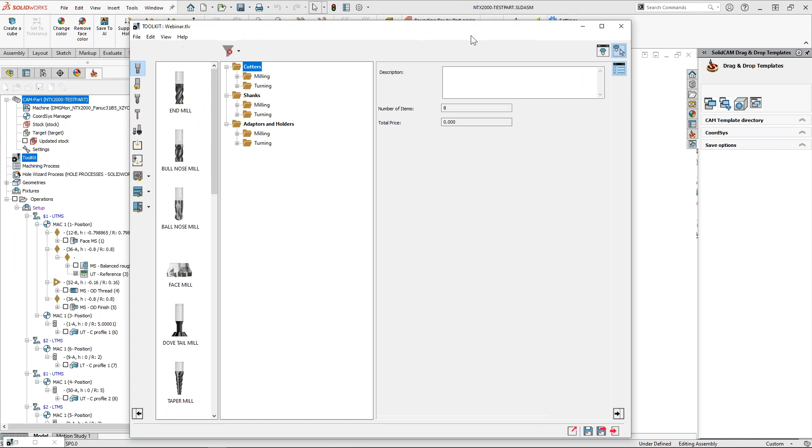All right, let's go to the tool library, tool components, webinar. And I will be adding my turning holder.

Okay, here we are. I'll just rename it as usual, and that's it. Now, of course, we need to put the connections. I'll take all my positions. I need basically position from holder to my joint one. And when we're talking about the vector, I will show that at the end. I'll take this screenshot here.

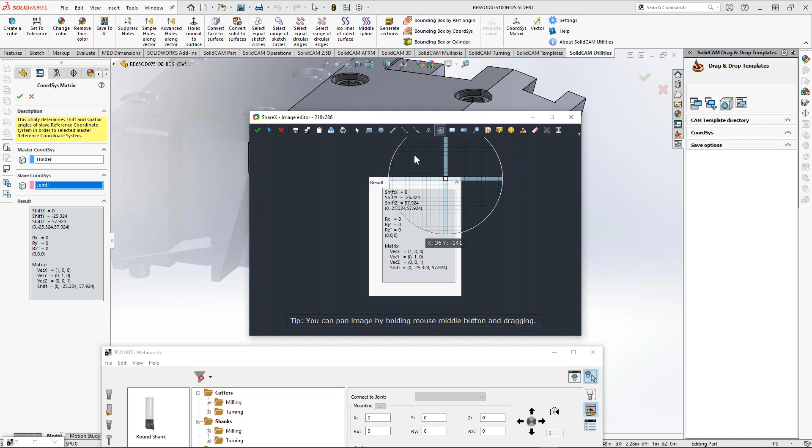Let me turn off all the rest. Okay, and then the joint two. Great, let's take a look over here.

So I'll call it joint one. My X orientation will be 0, minus 25.324, and 57.924. And orientations here are just basically 0, 0, 0. My drive unit type is just not driven.

I'll add a new static joint, my joint 2. My X position is minus 5, 33.5, and 63. And here we have 0, 0, and just guys remember this minus 15. So I'll just, where it is.

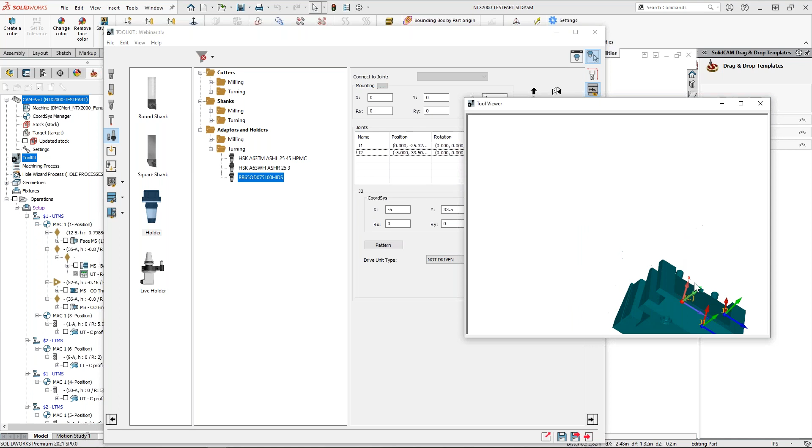It's here, so here's the holder. Here is the orientations, guys, here. Another, it's indexed for 15 degrees. It's not driven, so I'll just save.

And let's edit part tool library. I will pick my lower turret for it. Of course, it's not for attachments on the upper turret. And I'll pick one of the points here. My station would be as it is going on the right side, so I'll pick this 11 so I have enough space here. But guys, of course, this is very important to mention.

This is a property of a revolver. Not all machines with 12 stations have indexed positions, okay? Usually when a machine is supplied with these indexed positions, you can see over here different index angles. So it will be 24, maybe it will be here 23, and so on. Okay, so please pay attention on that.

What I'm showing you right now, it's on the NTX 2000. This particular machine doesn't have that capability, but anyway, you can use it. I can use this example to show you how to activate this feature.

So I will open this folder, just double click on it, and I will not put it on in my magazine. Actually, I'll put it on my station 11. Yes, so here it is.

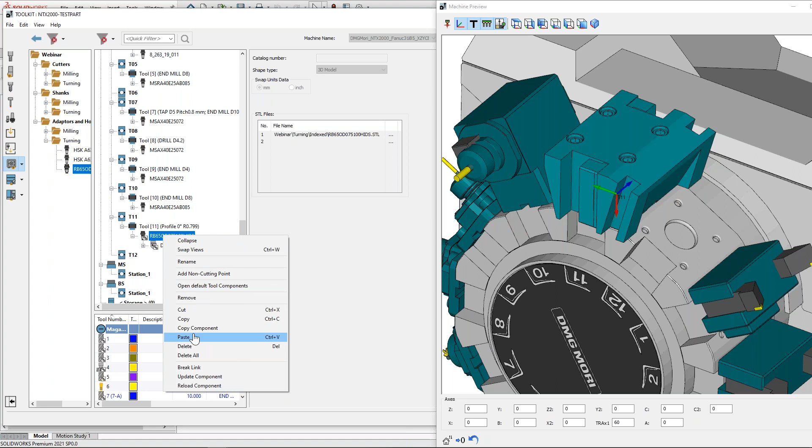So let me go to the joint. So I have, this is my joint 1, joint 2, okay. I actually took the property of the previous one, so I need to basically orientate my stuff correctly.

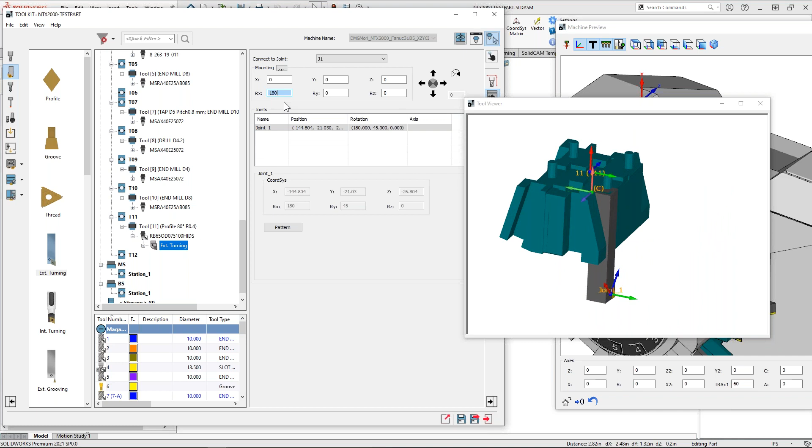So actually, why not? Let me just try with general one. So like this, I will be just rotating 180 here. That's just perfect. And I'll just add the same one over here.

Over here, and this one will be for the joint 2. As you can see, he's already in that position, so I'll just rotate it 180 degrees. Here we go. Of course, I can make it more shorter. Let me just do that quite quickly.

My length would be, let's say 110. And then I can go along the X just a little bit. And then over here, my length, 25, for instance. And this will be okay.

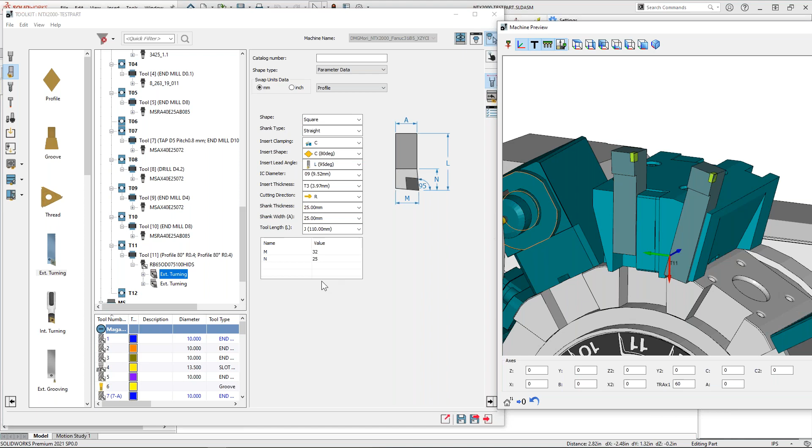Okay, so what we are missing here, it's same as with this tool. As you can see, selecting, let me close the tool viewer to not confuse us a bit. So if I'm switching to both of these tools, you can see that the revolver actually it's not changing the angle. Using this holder in this particular revolver will not be possible to make any turning with this tool, or at least now you actually will kill the machine with the shank with this edge over here.

So you need an option to have indexed position and to measure your tool in indexed position. So how to do that, guys? So I'll just save and exit.

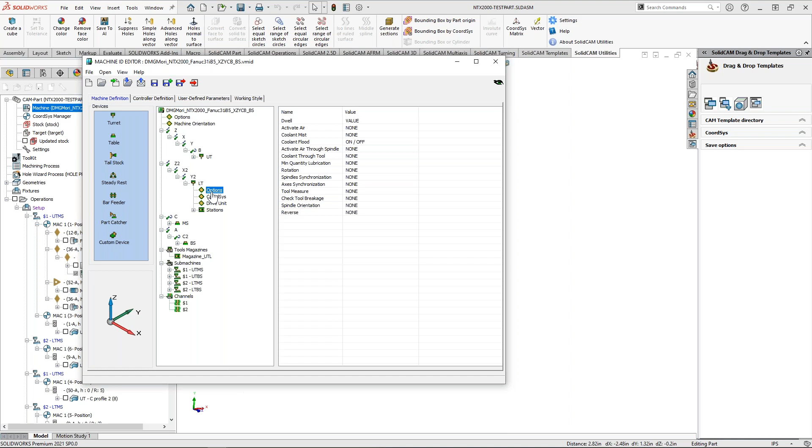And I will go to my lower turret, I will just click on option. Of course, for all the customers, it is not allowed just to change this parameter, basically, because it will have an influence on your tool offset and how it is coming from your post. So please contact your local support if your machine has this capability in order to change it, as it is a completely new option in 2021.

And here in the lower turret, there is an option of a rotary turret interpolation. And if I say this to yes, I'll just save and exit. Now I can go to my toolkit, find particular tool on 11, select my proper tool.

Which one it is, you can do focused here, use the focused button. Then you can see which one is selected, so you can basically switch it over. So this is the one I'm interested in.

You can go to your cutting point, and now here you have measure orientation, similar to the turret with the B-axis, but this time it's for the revolver. So you can click on this one, and 15 degrees is automatically detected. What you can see here in the machine preview is the indexed position, and the turret switches to this indexed position.

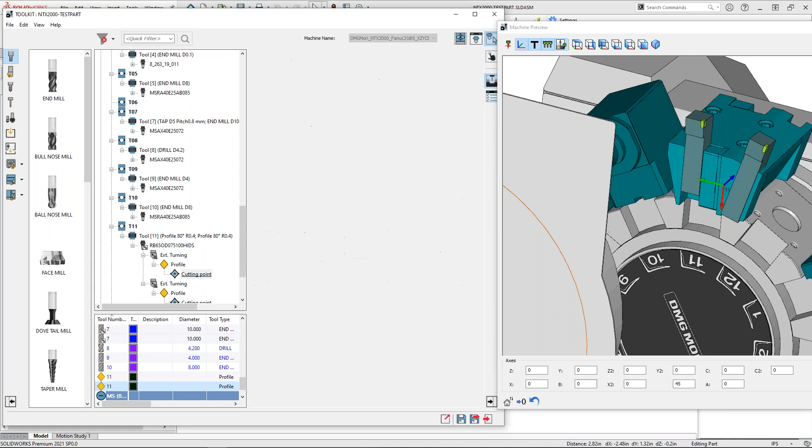So now you can see the revolver is actually changing all the time. Let's see how this works actually. So let me just save it, let me change this.

So I will be using, for instance, my next job, my balanced rough operation, I will be using my... it will be this one, just perfect orientation. And for my slave tool must be same radius, of course. Let me select this one. Let me find tool number 11, I think it was the second one, right?

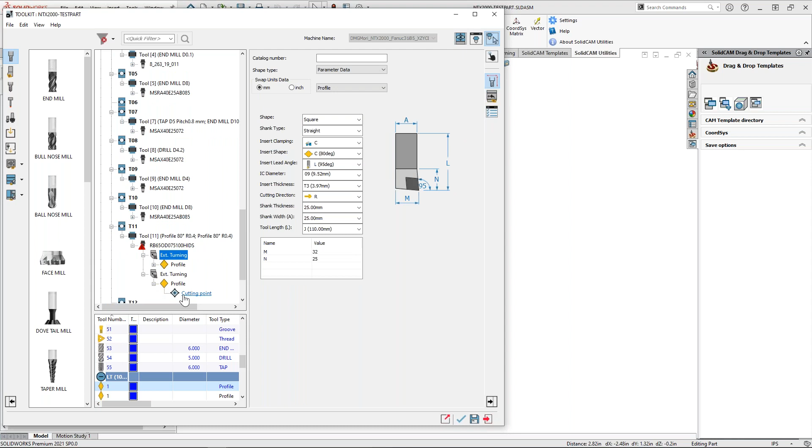0.4. Let me try the radius. I really want to show you this. I'll try with this. Maybe it will not be perfect, but let's give it a try. I haven't tried it.

Okay, works nice. So let me go to simulation. Here you go, guys, indexed position here, upper turret here. Here we go.

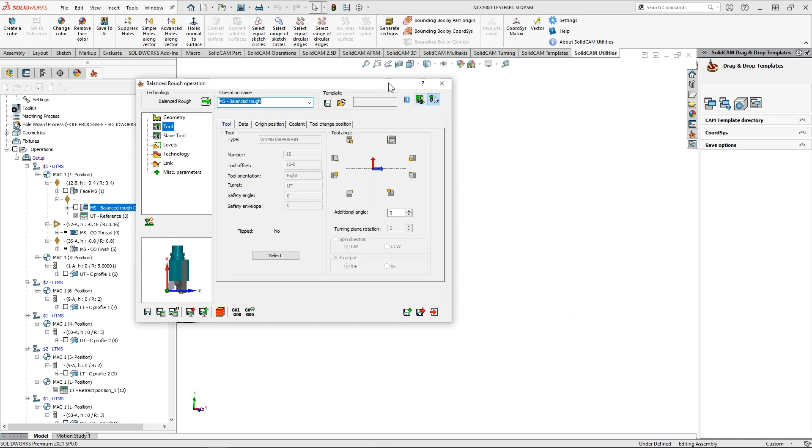And I will just quickly go through the questions if I have them. Let me just check them quickly. 1, 2, 3, but what happened here?

Oh yeah, okay, nice question, to not forget the icon vector. Okay, I'm going to show you this, guys, mounting plan.

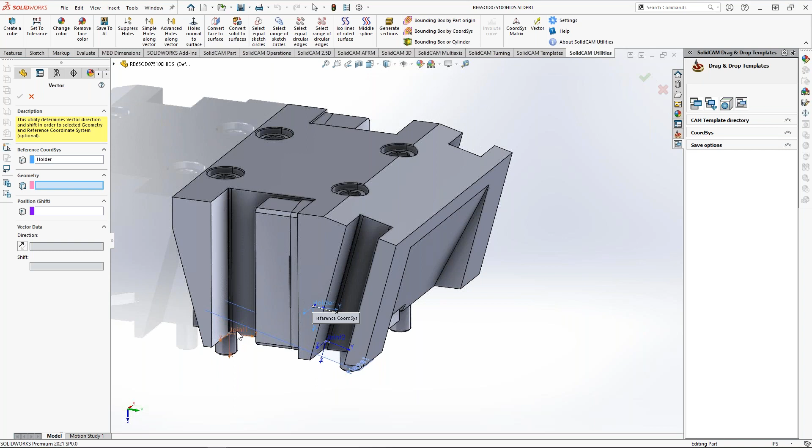The vector, if you click on the vector, you have basically the reference coordinate system, which I will say here for the holder. And the next geometry, it can be geometry or position, however you can click on this one and we will analyze the Z vector. And you will basically get, you can actually analyze the X vector, Y vector, Z vector, and you will get the shift and this three vector orientation.

Okay, so this is a feature that will allow you to pick on any coordinate system, but you don't need to really pick on the geometry. You can pick on the coordinate system, but you can pick also on the geometry.

What is so nice is that it also shows you here the, how is it called, it shows you also this X, Y, and Z shifts. It's so nice, and the vector that we are actually analyzing. So you actually get here the vector itself. It's so nice, so powerful.

It will be soon, it's still not in the download section on the website, guys, but it will be there shortly. Okay, so we are making a QA check on it.

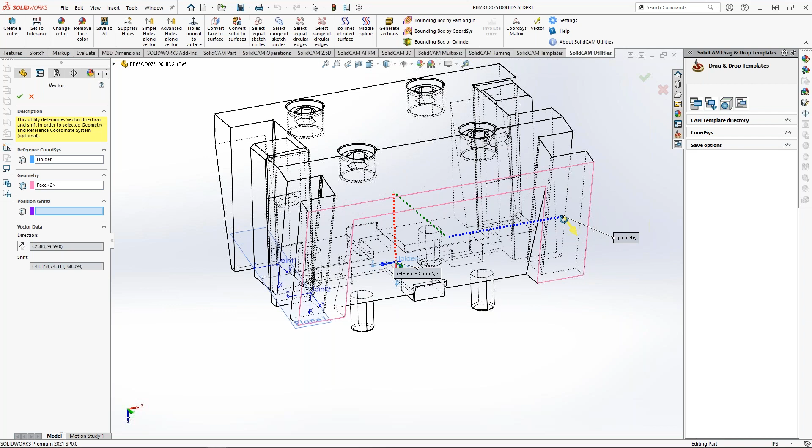I think that's it. Yeah, about the shifting position, you can shift it to any position basically and get that data there. Quite awesome, huh?